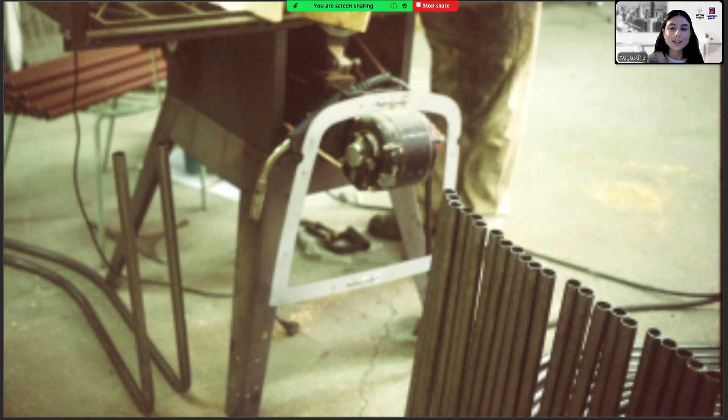So my aim for this project was to return to physical craft and making. Material isn't just something that is put on a building, but it's the very thing from which it is made.

So what I did was made everything by hand. Even all the drawings, everything I did for this whole project was by hand. I really placed material at the genesis of the design process, using the intrinsic qualities present in the material to create an architecture that honestly represents craft and reveals the mark of its maker.

So I used the workshop as my main source of developing design ideas. Dutch architect Anne Holtrop talks about material gesture, where the materiality and the gesture already bound to the material is something to work with, something that can define architecture and define the design. By tying design to the process of making and building, the design becomes self-evident.

So starting with material gestures in the design process can lead to initial ideas and forms that might be outside the realm of architecture to start off with, but then developing them to perform as architecture. In this way, architecture emerges from a process-driven approach.

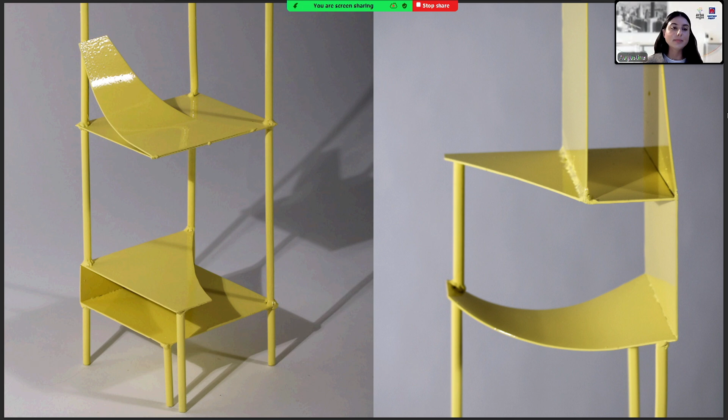Most of the time I don't even know what I'll come up with. I just go down to the workshop, and depending on how much material I have, using offcuts and scrap pieces to add this element of constraint to push these ideas.

Each piece I made can become an idea for an architectural project. I make them with the thought of how they might translate to the scale of a building, thinking about how even a curve or a joint or a texture can become an architectural element.

One thing I found really interesting was this process of hydroforming, where you basically inflate steel using water, just like a little water blaster, where the compressive strength of water is stronger than the tensional strength of steel. This allows for almost a release and control of what the final form of steel will take.

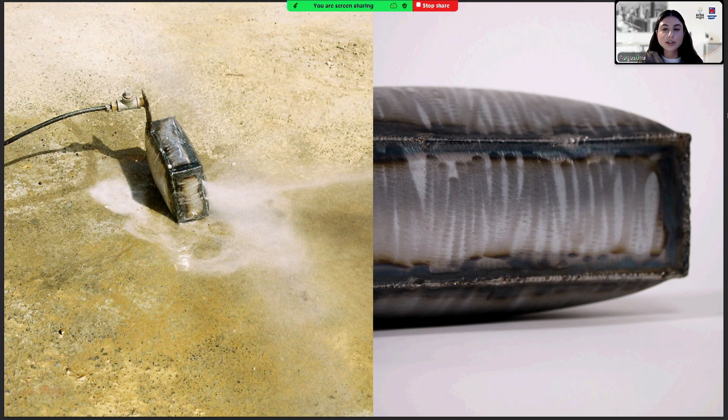Another material I heavily explored was clay and ceramics. I found that when you hold a ceramic, you can really understand it and anticipate the process that made it and the quality of the material. I found that this tangibility could be read.

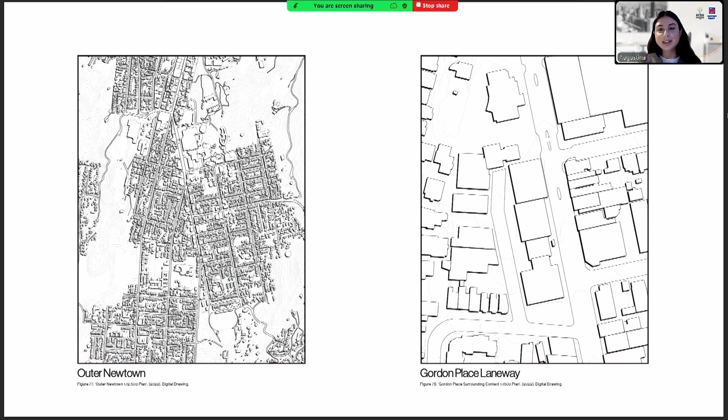So this is my site, Newtown, Wellington, in the city that I live. It's quite a dynamic neighborhood, with a lot of social housing and a lot of different ethnicities coming together in this space. I really wanted to create a community space that acknowledges the cultural background of the daily lives and practices of the people who use the space.

In dealing with this laneway that my site is on, I found that it's not enough to just put a building there and expect people to go to the site. To propose a site focusing on a laneway and only think of housing or a community space would ignore the culture and context of Newtown and what it takes to bring people in from the main streets. So I decided to create a community building and some form of housing across the laneway as well, and hospitality.

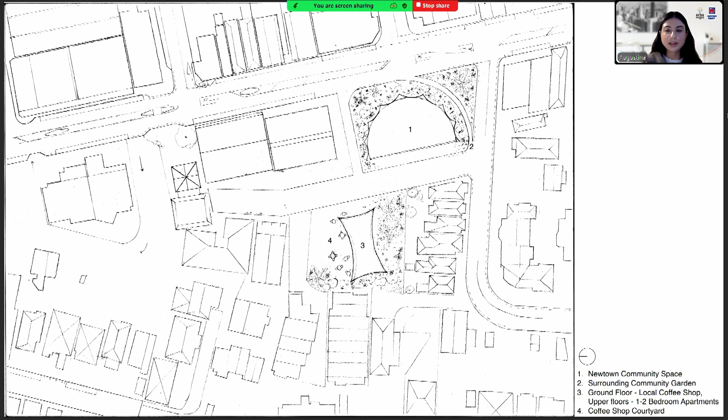From there, more formal explorations are developed solely using material as a design driver. Previous investigations, with this knowledge I developed crafting using steel and clay, timber and fabric, is all deployed into an architectural inquiry where the act of making and material gesture converge at an architectural scale. My challenge was to bridge this gap from the furniture scale I explored to a much larger architectural scale, all while preserving the materiality explored.

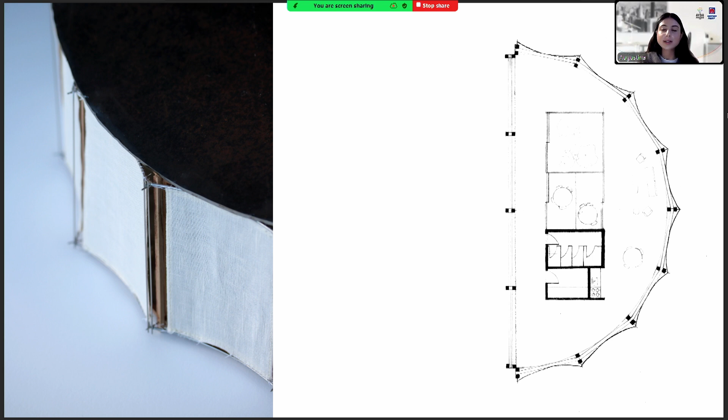In order to engage a neighborhood and create a space that doesn't just become empty or sterile to a community, the program I decided for the building has veered towards a ceramic studio and gallery open to the street. This architecture is becoming in service of craftsmanship.

The question I posed at the beginning of this project was asking how the inherent qualities in a material can be used to produce architecture. My realization now has been to learn and understand materials, all done through this act of making, where craft becomes intrinsically linked to the material.

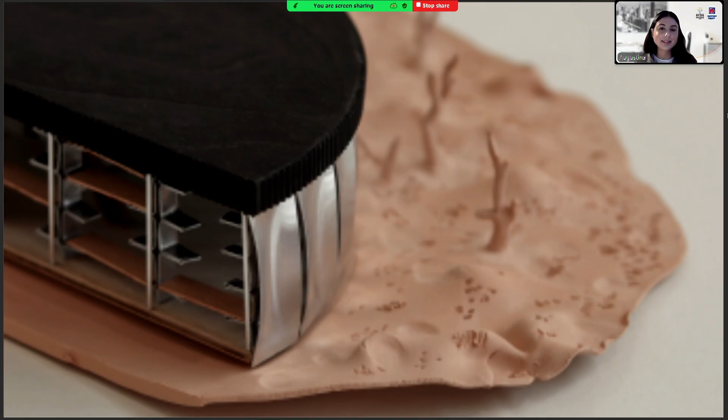So this is my final design. I went through a process of iterating through materials, whether to use tension fabric, timber, or steel. The materials here for the facade and within the final architecture all reflect similar qualities. Steel sheet will patina over time, and ceramic tiles also hold this record of process.

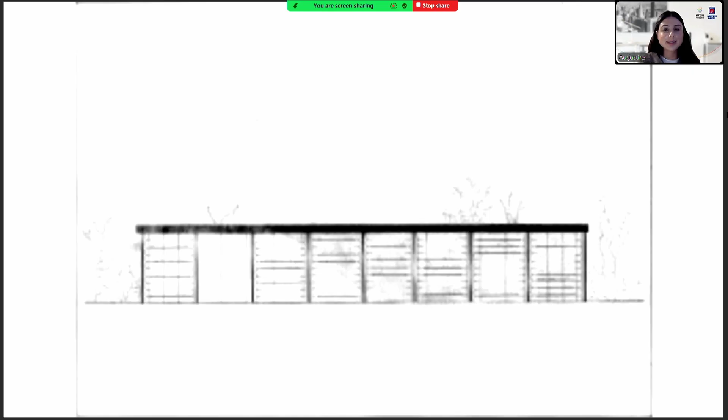The scale and pattern of each aspect were chosen to reflect the art of the hand. These operable hydroformed steel sheet panels line the edge of the building, and they all face the main street.

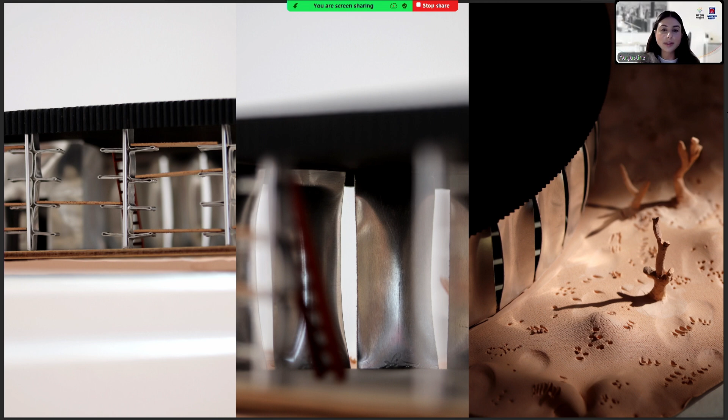These hydroformed steel panels act as a facade, curving outwards in contrast to the building's overall form curving inwards. They provide some seclusion from the street edge, and these operable panels act to shade the building, allowing for a cool environment to work with wet clay, creating almost a passive ventilation system.

Here you can see a scale mock-up of the hydroform panels, and also a detail to show how you can pull them open and closed at 90 degrees, so the building can completely open up or be completely closed.

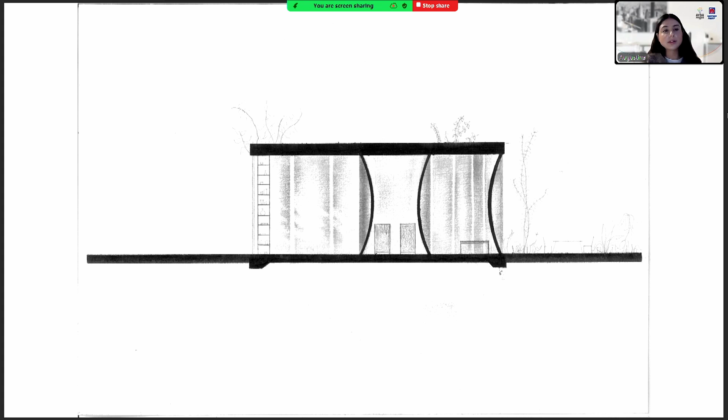Here you can see the building also has this hydroform core in the middle, which acts to use material explorations I have developed to actually hold the building up as well, tying structure and form together. I discovered quite a bit of strength with the dual curve used in the hydroform, and chose to use this as the core structure for the building.

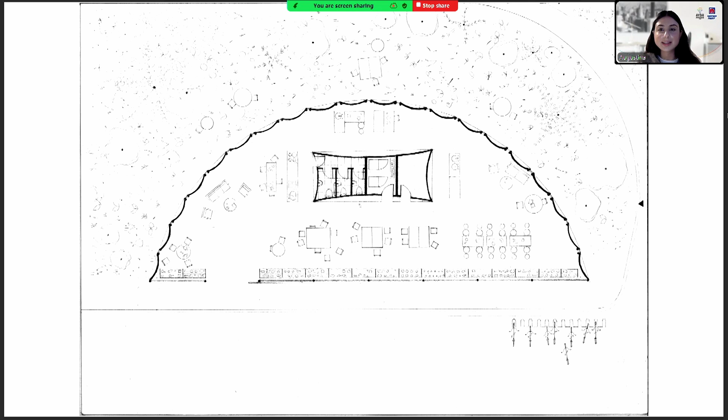Users of the ceramic studio become makers of the space. From pulling panels open and closed to shifting shelves, the environment is constantly changed and crafted by the users. The discovery of the hydroform technique and the building of tile inset wall prototypes were both inquiries aimed at merging form, material, and structure together, where the formal qualities of steel and clay act to hold the building up. This hydroform core centered in the ceramic studio creates unity of design intent and structure instead of just ornamentation.

Throughout this whole making process, I really realized how impatient I was. I found myself craving shortcuts and started to see why handcraft has become suppressed due to the cost of labor, the time taken, and the risk of mistake and imperfection. Throughout this project, I realized my qualm is not actually with the machine-made object, but rather with material knowledge and craft being removed and separated from the process of design.

When we make objects with our hands, we utilize the knowledge we have on material in order to design. But with reliance on the machine, and this hand being removed from the process of making, the knowledge library and material contained within a craftsman's hands becomes second to that of the machine.